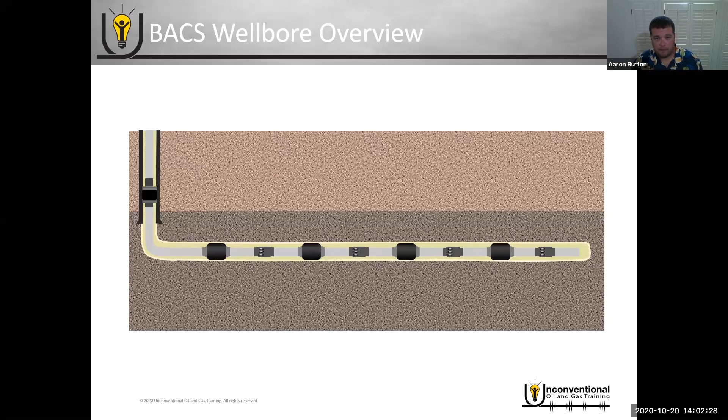The next system we'll talk about is the ball activated completion system. We'll start by looking at a well overview. We already have our horizontal well drilled in our target reservoir, with our intended completion run at depth. The key components are going to be open hole packers, which provide our annular isolation.

So at least initially, these were designed as open hole completion systems rather than cemented like we saw with plug and perf. The other key component is the ball activated frac sleeves.

Some of the other components, secondary components, are going to be the casing packer. I consider that a secondary component because as long as that packer can hold up to the weight of the completion below it, as well as the pressures and temperatures during the frac job, you can really run whatever packer you want there. You can run a liner hanger, a permanent packer, sand control packer, premium packers, or really whatever's cheapest and most readily available in your area.

Now, to give you some of the nomenclature here, this is toe-to-heel fracturing again. So the first stage in the system is stage 1, at the toe of the well, and then you work your way back up the wellbore.

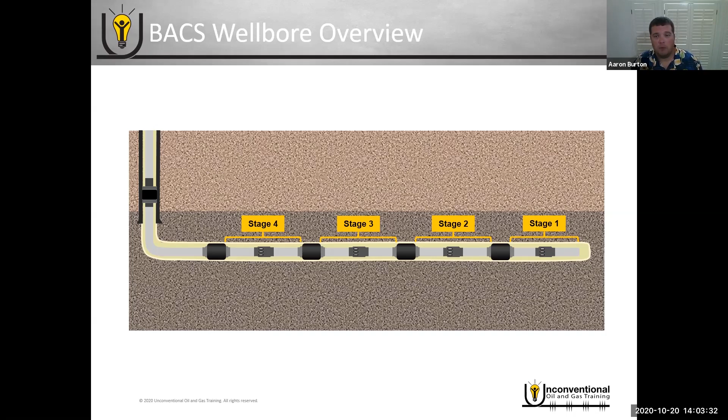Now just to give you a reference, these are installed with the drilling rig using your casing string. Each joint of casing is roughly 40 feet. So let's assume we want 80 feet of spacing between each of our tool components. We'd run 2 joints of casing, 80 feet, then make up this open hole packer to the casing. Then we'd run another 2 joints of casing directly to that packer, then our frac sleeve, another 2 joints of casing for 80 feet, and then another open hole packer. You would just repeat that process.

So you're actually going to run it with the drilling rig, spacing out in the well as you want to, as your frac design calls for. Then once you've installed the system, you can do all your setting that we'll go through right now, do your pressure testing, and then move your drilling rig off of location.

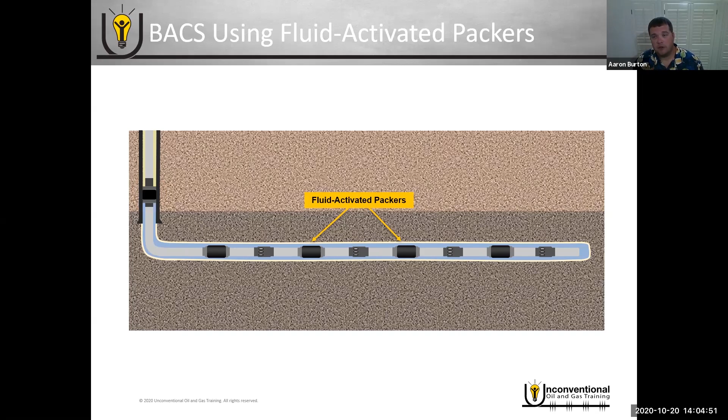The first setup we'll look at is the fluid activated packers. Once you've got your completion to the intended depth, you pump your activation fluid through your tubing, through your casing, into the annulus. Once you've spotted that fluid, you can set your casing packer. Once your casing packer has been set, you can pressure test, ensure everything is set, and move your drilling rig off of location.

Now over time, packers are going to react with that activation fluid. They're going to swell out and contact the target reservoir, and that's what provides your annular isolation between each sleeve.

Once you're ready to begin fracturing, you bring out your frac crew and drop the first ball in the system, pump it down hole to the first sleeve, and once it gets on seat, you apply pressure, shift that first sleeve open, and you can begin fracturing your first stage.

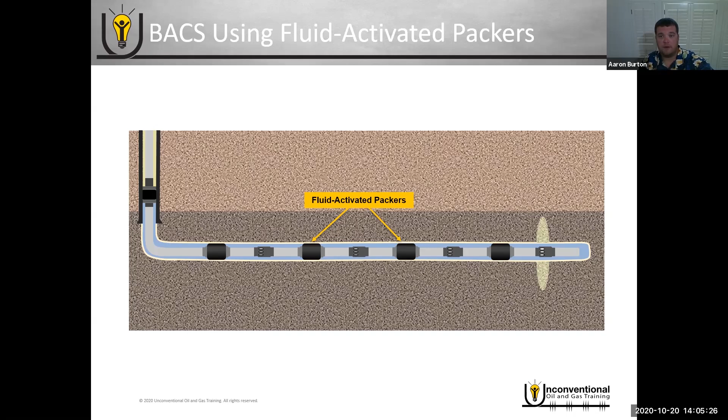The other type of setup for these ball activated completion systems is using hydraulic set packers. Once again, we already have our well drilled, we have our completion system in the wellbore, and we're using the casing to space out just like before, but now these are hydraulic set packers in this scenario.

So once you get to the intended depth, you're going to have one or two additional tools at the toe of the well. And the first one is going to be the isolation tool.

What that allows you to do is, when you're running the system in the wellbore, you can still circulate through your casing. But once you get to the intended depth, you drop the first ball in the system, pump it down hole, and once it lands on the isolation tool, you apply pressure, it shuts off, and now you have isolation through your tubing.

So once you've done that, that allows you to set all of your hydraulic equipment in the wellbore. So you'll continue raising your pressure, and these pressures are staggered.

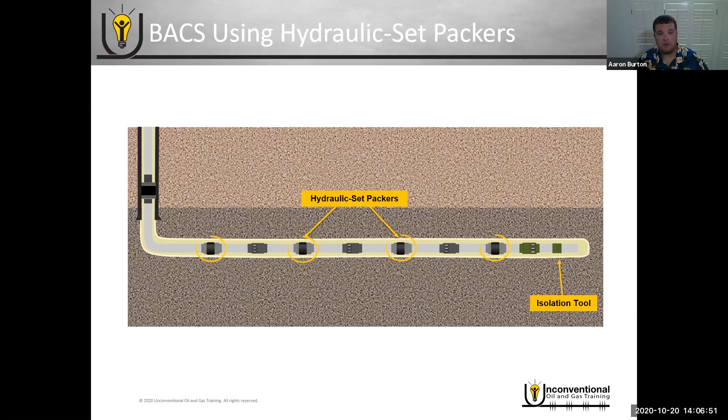Just to use some good, clean, round example numbers, maybe at 1500 PSI your casing packer will set. So you raise your pressure up to 1500 PSI, set your casing packer, and then maybe your open hole hydraulic set packer sets at 2500 PSI. So you continue raising your pressure to 2500 PSI and set your hydraulic set packers.

The second piece of equipment at the toe that's different is your pressure activated frac sleeve. Remember, as soon as you've set this isolation tool, you no longer have the ability to pump into your target reservoir, and above it these are the ball activated frac sleeves. So you're very limited as to what you can do through tubing - a tubing conveyed perforating run is not an option in most cases.

So this is a pressure activated frac sleeve that will open when you apply the right amount of pressure. If we set our casing packer at 1500 PSI and our open hole packers at 2500 PSI, then your pressure activated sleeve may be set at 5000 PSI.

That way you can set all of your hydraulic equipment, do all your pressure testing, and once you confirm that everything's holding, you can move your drilling rig off location, and the pressure activated frac sleeve remains in the closed position.

Once you're ready to begin fracturing, bring out your frac crew, you apply that 5000 PSI, the pressure activated sleeve shifts open, and then you can begin fracturing your first stage.

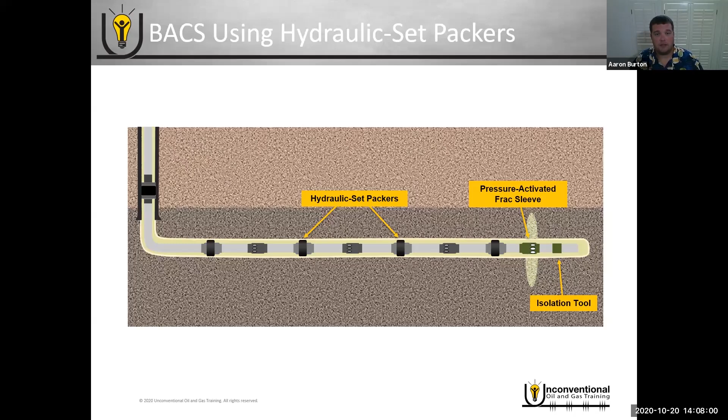Now, once you finish fracturing your first stage, it doesn't matter which setup you're using as far as the fluid activated packers versus the hydraulic set packers - the fracturing procedure is the same.

So we'll zoom in here to the second sleeve of the well. Overall, these are a very simple conceptual design. You've got a frac sleeve made up to your casing, and you have frac ports built into that sleeve.

If we look at a cutout view, behind that you're going to have an insert that's covering up the frac ports in the closed position, and it also has a ball seat profile in that insert.

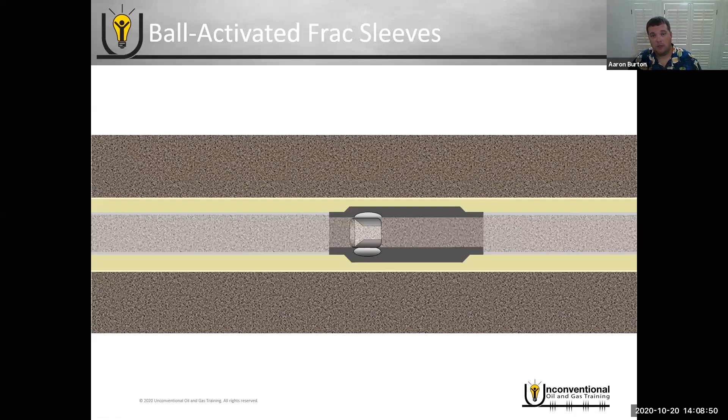So as we're fracturing stage one, we're pushing our fluid and proppant through all of the ball seats above it. Now, as we finish fracturing stage one, we drop the ball that corresponds to the second sleeve, pump it down hole. Once it lands on seat, we apply pressure, it shifts the sleeve open, and then you can begin fracturing your second stage. When the ball lands on seat, it provides through-tubing isolation from the previously fractured stage, and forces the fluid to divert out of the ports in this second sleeve.

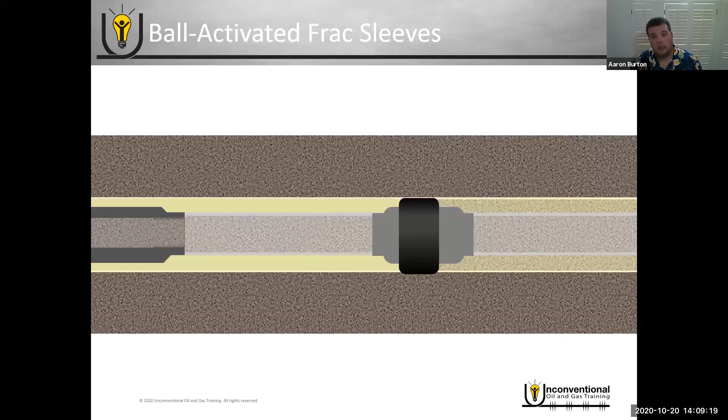So if we move up the wellbore to the third sleeve, as we're finishing fracturing our second stage, we drop the ball that corresponds to this third sleeve. We pump it down hole, it lands on seat, apply pressure, shift the sleeve open, and the fluid is diverted out of our third stage now.

So you don't actually ever have to shut down your frac job during the pumping process. You just have to drop the ball in and pump it down hole to the next seat.

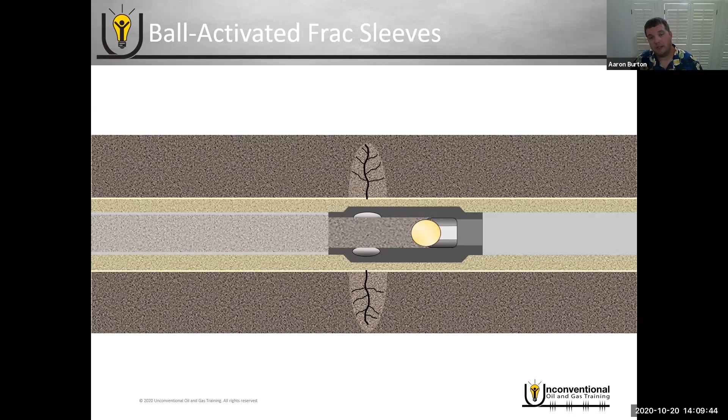It's a little difficult to see in this animation, but each of these balls gets larger as you go up the wellbore. So starting at the toe of the well, you have the smallest ball of the system, because that smallest ball has to get through all of the larger ball seats above it. They get incrementally larger as you go back towards the heel, so the smallest ball is at the first stage of the well, and the largest ball is at the heelmost, final stage.

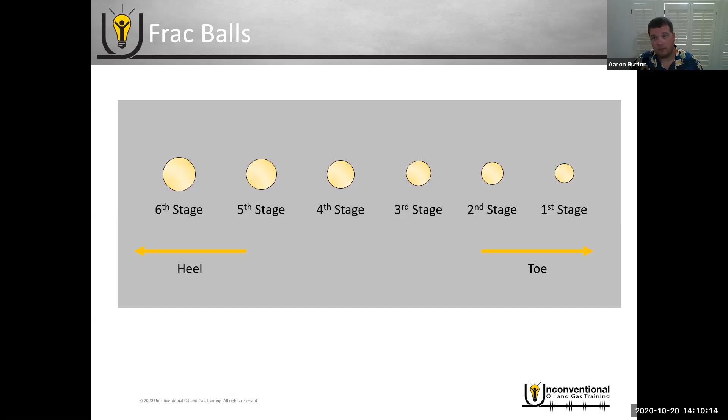To give you an idea of how many stages you can have with this type of system, a large majority of these systems are run in applications with 4.5-inch casing, mostly on the US side of the Bakken or Canadian plays. With 4.5-inch casing, if you need about 10,000 PSI, you're limited to about 40 stages with this system. But if you can go less than 10,000 PSI, or less than 5,000 PSI, you can get up to 60 or 65 stages, assuming you're using the openhole system we're discussing here. It's a little different in the cemented system we'll talk about in a minute.

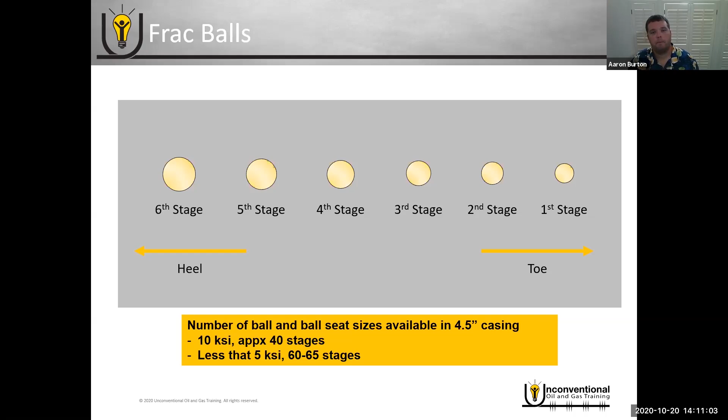After this, you just repeat the process of fracturing. As you're finishing your third stage, you drop the ball corresponding to the fourth sleeve, pump it downhole, and once it lands on seat, apply pressure, the sleeve shifts open, and you fracture the fourth stage. Then, without ever shutting down your pumping, you drop the ball for the fifth stage, pump it downhole, pressure up, open the fifth sleeve, and begin the fifth stage fracture. This is one of the highlights of this system—it's very efficient at surface because you don't have to shut down pumping between stages. If everything goes correctly, you get nonstop fracturing operations.

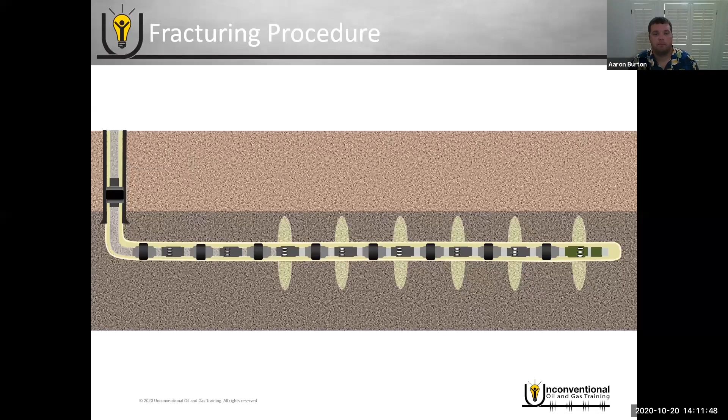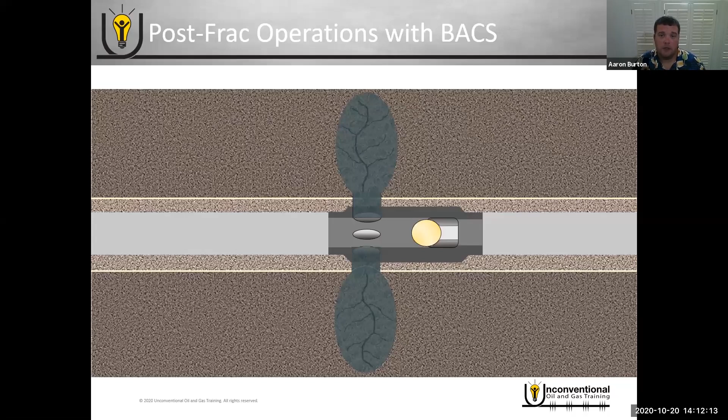We'll zoom back into an individual sleeve to talk about post-frac operations. We produce our hydrocarbons through the fractures we've created, and back through the ports in the sleeve where we fractured out of. So not only are the sleeves the conduit for the frac job, they're also the conduit for production as well. Production from below the sleeve will push that ball off seat and back towards surface.

In a lot of cases nowadays, those are also the dissolvable frac balls, very similar to the dissolvable frac plugs we saw yesterday. The frac balls are typically dissolvable alloys, and they'll disintegrate and remove themselves from the wellbore just in the fluids that are in the well. That way they don't stay in the wellbore or get caught up in it, and especially in oil plays where there's not enough velocity to bring those balls back to surface, that can be a good feature to have. The other thing about the dissolvable alloys is they actually add a lot of strength, so the 40 stage and 60 stage systems we were referencing were really unlocked because of these alloy balls having additional strength.

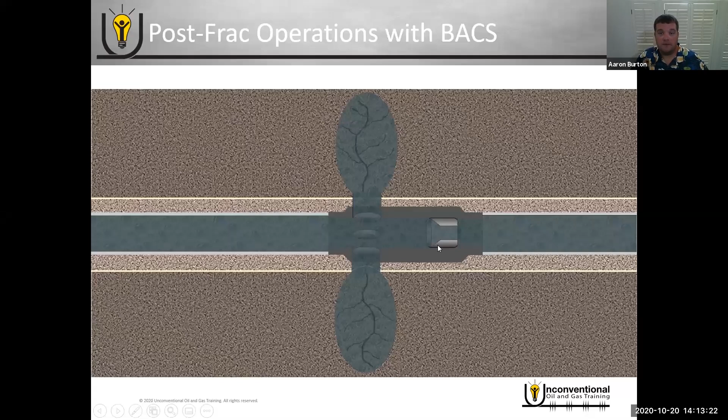Now, this is an interventionless system—you don't have to do anything after the frac job, you can just produce through it like we're showing here. But these ball seats have a diameter restriction, so if that's an issue, it is possible to go in and mill those ball seats out and get a near full wellbore diameter afterwards. The ball seats are designed, mostly of cast iron, to be as short and compact as possible and easy to mill out. So it can be an interventionless system with diameter restrictions, but you can go in and intervene afterwards and get your full diameter again.

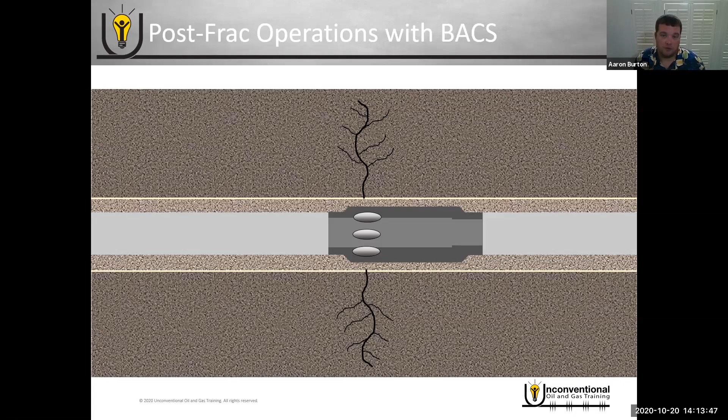This is a case history from the US side of the Bakken, from Nine Energy Services, and it really highlights the efficiencies with this type of system. If I recall correctly, this is a case history from 2013.

It's a 50-stage system with the 4.5-inch liners I was talking about, and you can see all the remaining frac job details there. By today's standards, this is a very small frac job, at least in the US, so keep that in mind as well. But to stimulate this 50-stage well, they had 51.2 hours total time.

So that's from opening the wellhead to begin fracturing to shutting it back in. The actual pumping time was 46.7 hours, so overall they were able to pump a 50-stage frac job in 46.7 hours. They also had non-productive time of 4.5 hours. I don't know for sure what it was, but if I had to guess, I'd say it was something like pump maintenance. Overall, this case history really shows how quick and efficient these systems can be at surface.

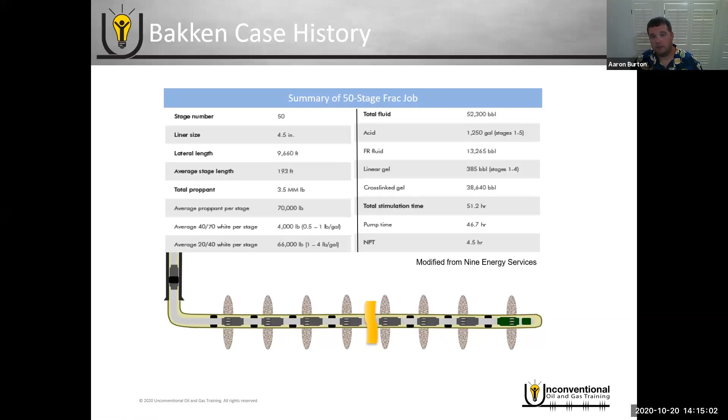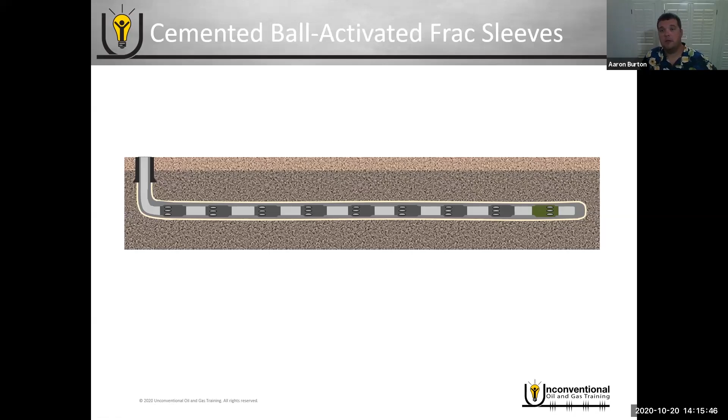Another alternate to the open hole system is the cemented ball activated frac sleeve system. Overall, the fracturing procedure is virtually the same, but your wellbore construction is different. Instead of having packers between the sleeves, you pump cement through the casing into the annulus, and that's what provides your annular isolation. At the toe, we have a cementable pressure activated frac sleeve. Once you've cemented it in place and done your pressure testing, you move your drilling rig off location, and once you're ready to begin fracturing, you rig up your frac crew, apply the right amount of pressure, the first stage sleeve opens, and then you drop the balls in the correct order, just like with the open hole systems.

It's important to consider that in the wellbore construction you have a couple of additional components. When cementing a well into place, you pump the cement through your casing, and you follow that with a cement wiper plug, which does exactly what it sounds like - it wipes the cement out of the casing so you don't leave any cement stringers behind, and it pushes the cement into the annulus.

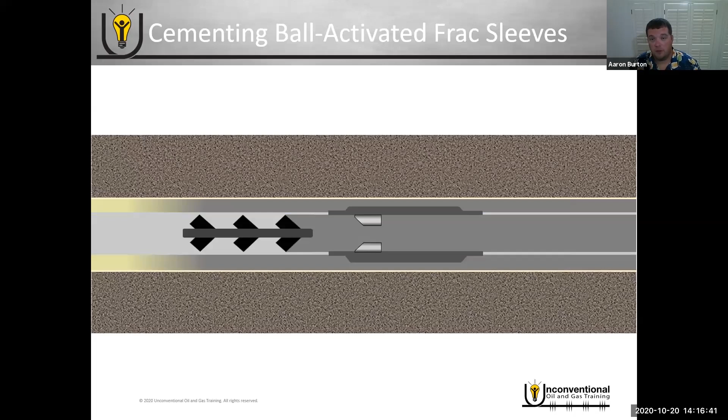It's no different when you have the frac sleeves, except now you're pumping through those reduced diameters in the ball seats. You still have to pump your cement through the casing, through all of the ball seats, and then follow it with the cement wiper plug so the cement isn't remaining in your casing and hindering your completion. It's important to consider this because the cement wiper plug can't get hung up in your ball seat and prematurely open the sleeve, otherwise you're going to open the sleeve and dump all your cement right back into your casing.

So there is a diameter restriction with the cemented frac sleeves. Generally speaking, it depends a bit on which service company you're using, but typically you're limited to a 2-inch diameter ball seat being the smallest one you can have in the system. What that translates into is typically 25, maybe 30 stages at max with these cemented sleeves.

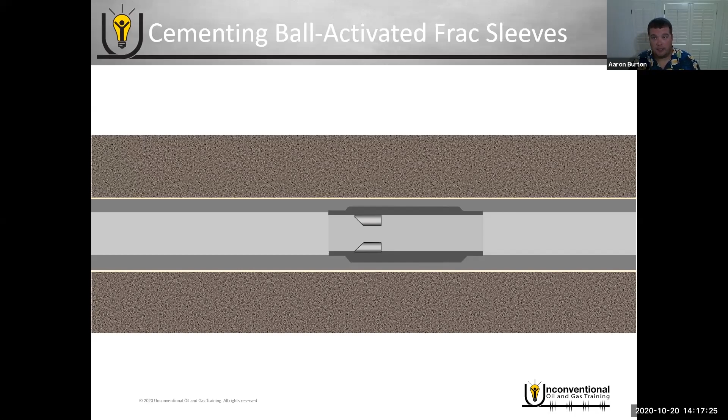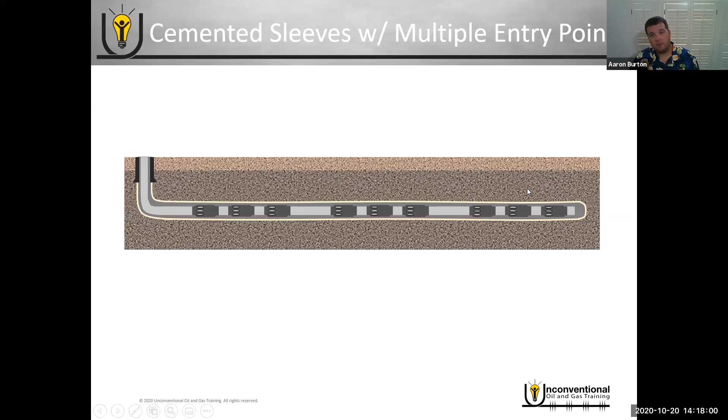But there is also another technology that allows the cemented sleeves to have multi-entry points. With these sleeves, the overall wellbore construction looks very similar to the regular cemented sleeves we were looking at, but now these are multi-entry sleeves. You're still going to drop balls in order, but the difference is each ball opens multiple sleeves - in this case, 3 sleeves per stage. So we drop our first frac ball, it opens this sleeve, passes through, opens this sleeve, passes through, and opens this sleeve, and it seats like a regular ball seat, opens this sleeve and isolates from below, and now you fracture out of each of these sleeves individually.

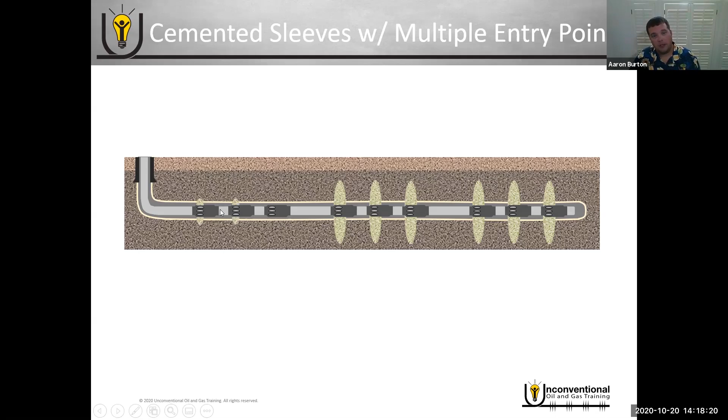You drop the next size ball and do the same thing for the next stage, and then you drop the next largest ball and do the same thing for the next 3 sleeves.

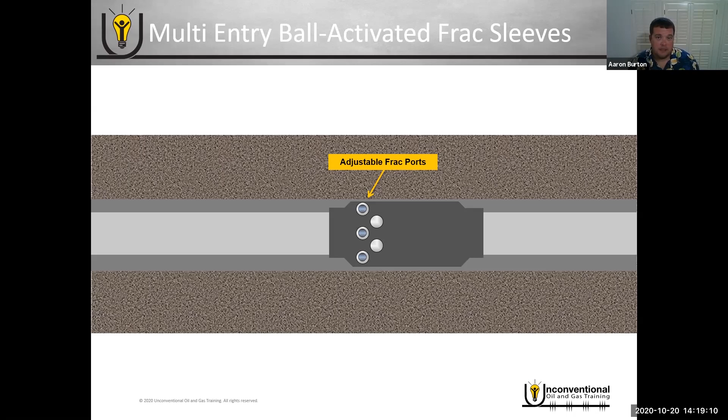Now, as we saw with the multi-entry ball frac sleeves, what that allows you to do is start mimicking plug and perf with multiple clusters. Because of this feature, in a lot of cases you'll see these multi-entry sleeves have adjustable frac ports. So instead of having fixed frac ports like we saw before, these are ports you can adjust - you can block some off if you want less flow area and you're trying to do a limited entry perforating strategy, or make some larger or smaller. So you have full capability to adjust and use these types of sleeves in a very similar fashion as clusters with plug and perf, and do any limited entry strategies you may have as well.

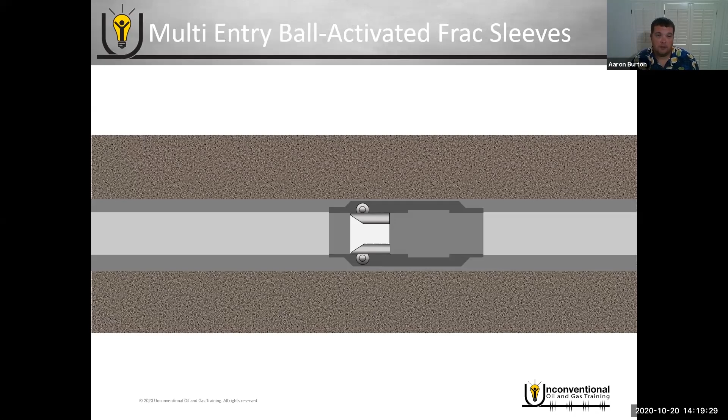If we look at the cutout view behind it, it's very similar to the traditional sleeves. You have an insert covering up those ports when it's in the closed position, and it has a ball seat profile in it. But with these sleeves, once the ball lands on seat, you apply pressure, shift it open, and now there's a slot in the back side of the sleeve that allows that ball seat to subside, and then the ball can keep moving down the wellbore and opening more sleeves. That's what gives it the ability to open multiple sleeves with one size ball.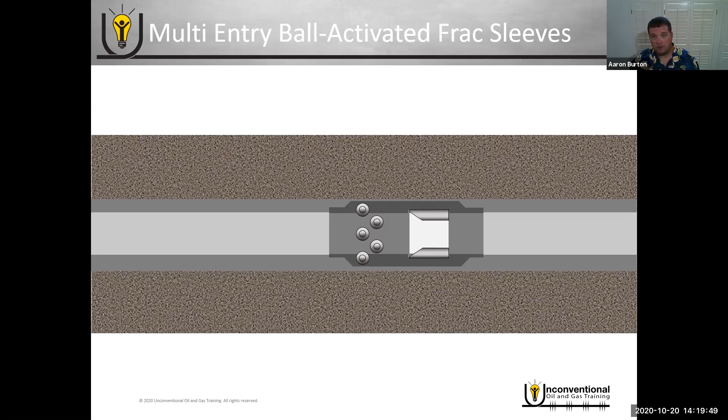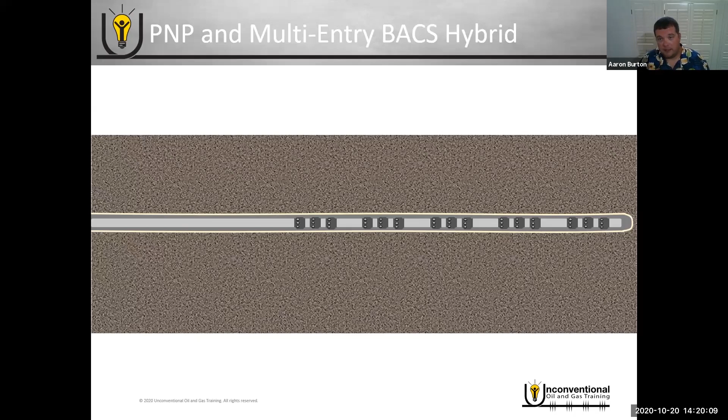A big part of the reason these are designed very similar to plug and perf is because that's where most of these types of sleeves are run right now, as a hybrid system with plug and perf. They'll run these multi-entry sleeves at the toe of the well, then drop balls in the correct order to open the sleeves, and once finished, switch back to traditional composite plug and perf perforation or fracturing operations.

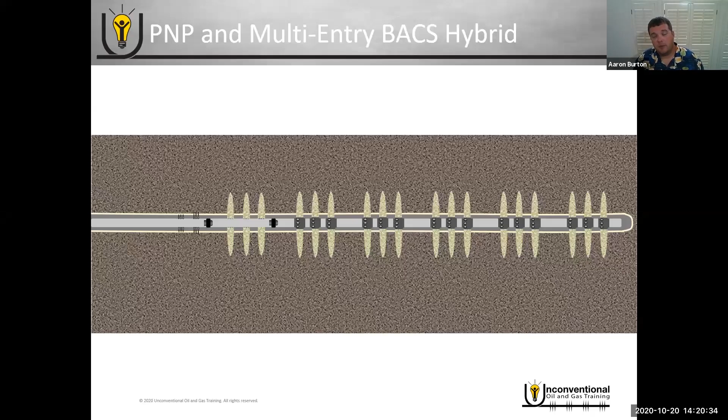Once they finish those, they go back to their plug and perf assembly to finish up the well. The reason they do this is because typically in longer laterals, they're trying to do plug and perf within their safe operating range of coiled tubing, but want an interventionless system outside of their coiled tubing range. This allows you to use plug and perf in longer laterals, just like we saw with the dissolvable plugs. You run those at the toe because it's interventionless, and you don't have to risk mill-out operations in those longer laterals.

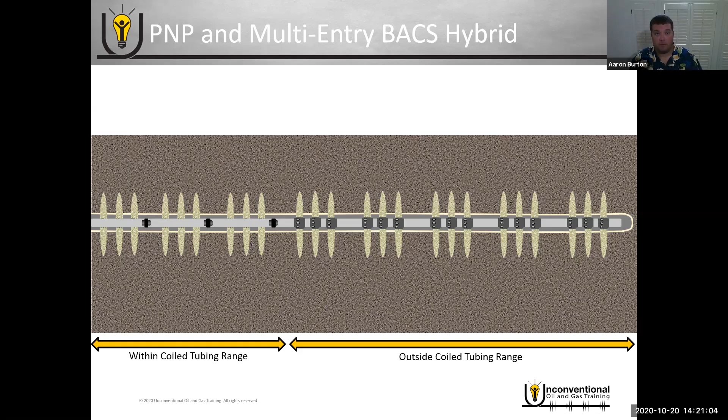One of the newer technologies with these types of sleeves are frac sleeves with counter mechanisms. There's a lot of different ways to do this, and several service companies do have some of these sleeves available now. The version we're going to look at here is based purely on mechanical motion.

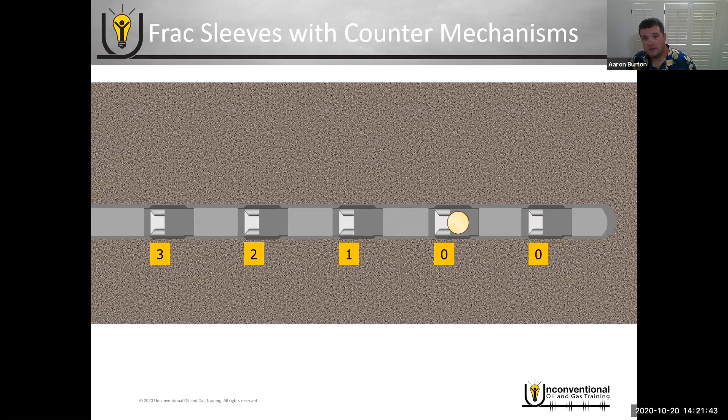So we have 5 sleeves here. The yellow number tag is the counter on the sleeve. We drop a ball, and each time the ball passes through a sleeve, the counter counts down 1. So when the ball gets to sleeve 0, it's in the set position. You can apply pressure, shift that sleeve open, and then begin fracturing in the first stage.

Now you're going to drop the exact same size ball again, and it's going to count down, but now the second sleeve in the system is on the 0 counter and in the set position. Once the ball gets there, it catches, you apply pressure, shift the sleeve open, and begin your second stage fracture. Then you drop the exact same size ball again, and it counts down, but now the third sleeve is at the 0 count and in the set position, so it catches, you shift the sleeve open, and begin fracturing your third stage.

Like I said, there's a handful of service companies - I think my last count was maybe 8 at this point - that offer a version of this type of sleeve. It can be purely mechanical motion that counts, it can also be electronics in the sleeve that count, and there are some versions that use both mechanical and electrical components to count the frac balls as they pass.

So the benefit of these types of sleeves is you get a virtually unlimited number of stages with a minimal diameter restriction, or in some cases with the electronic sleeves, you might not even have a diameter restriction because you're not relying on a ball seat diameter. That's the whole point of these sleeves - that's the innovation - trying to get that virtually unlimited number of stages with minimal or no diameter restriction.

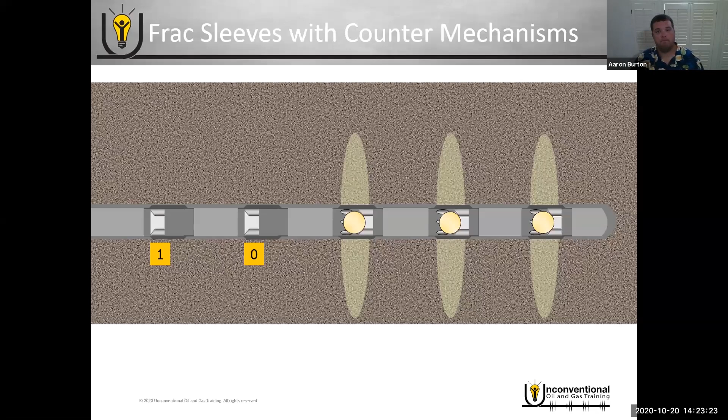What this system allows us to do is actually pump the ball seat into the well and into the insert. So on the insert, instead of having a ball seat, we have a collet profile, and the ball seat itself that we're pumping down hole has a collet on it. Just to clarify, this is not with wireline - this is pumped down, just the ball seat itself. The way you're able to do that is you already have the ball on seat as well, which gives you enough surface area to pump that assembly down hole without it having to be on wireline.

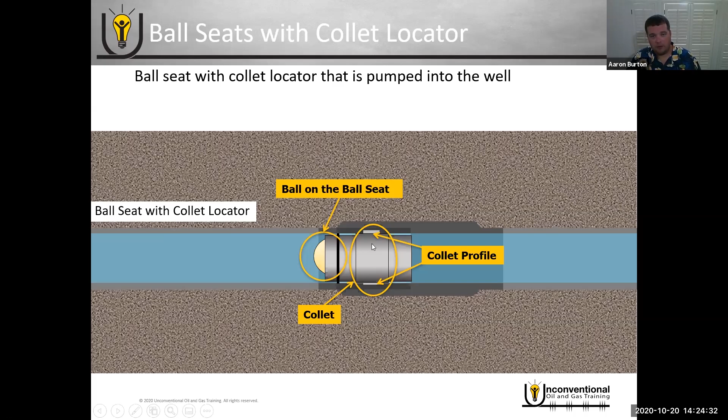Now, as you can see here, the collet and the collet profile do not match up - the collet's too big for this collet profile, so it continues pumping down the wellbore. As it continues moving down the wellbore and comes to the seat that it correlates with, that collet will snap into the profile, and then the ball seat is placed in the frac sleeve.

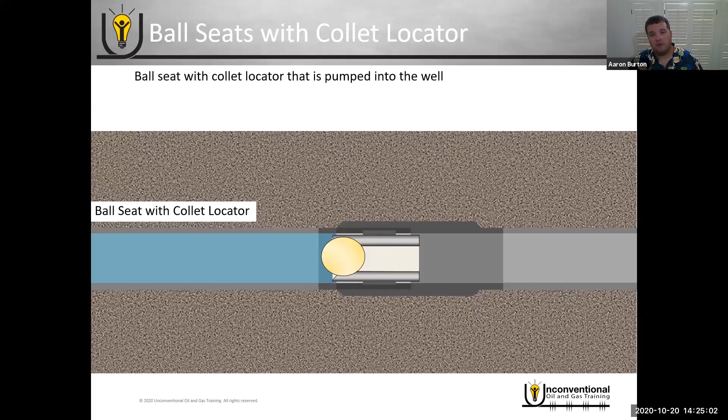Now if we look at the cutout, this is just the ball seat itself, but the ball is already on seat. So once we latch in the sleeve, we're going to apply pressure, shift the sleeve open, and we expose the frac ports, and it looks just like you would with a traditional sleeve now.

Once you're finished fracturing, the ball will dissolve, remove itself from the seat, and because you're actually placing the ball seats in the wellbore, you can use the same size ball seat over and over again. So you're going to choose the largest size ball seat, and you can do one of two things.

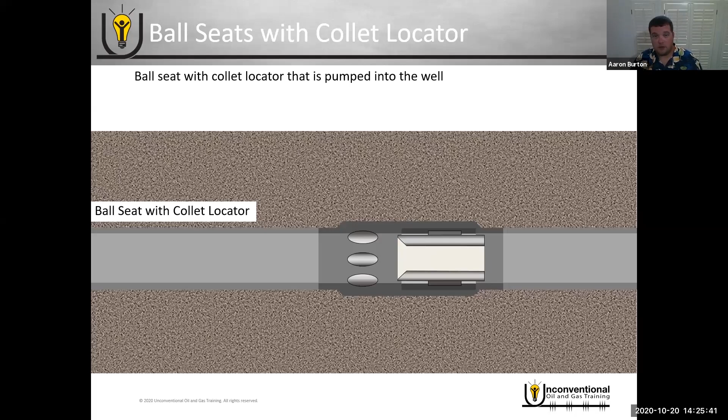You can either consider it an interventionless system and produce through that large profile, or if you think that's going to be a problem, then you can go in and remove these ball seats with the collets with through tubing intervention. So you run in your through tubing tool, you expand it out once you get past the seat, and then you can pull up the wellbore and drag the ball seats back out of the well.

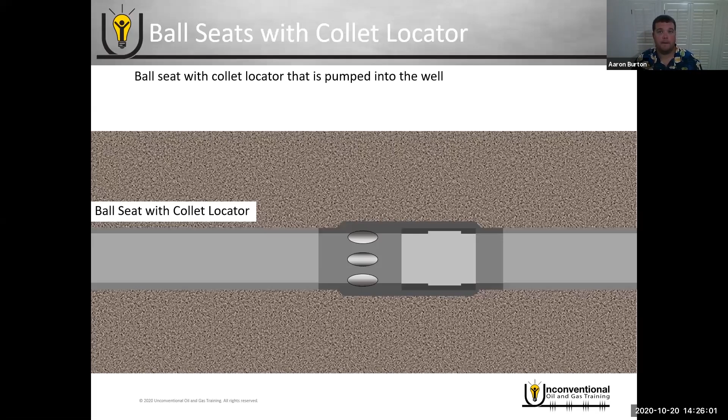So that's the ball activated completion system. The next system that we're going to discuss is going to be the coiled tubing activated system.

And we're going to start with the setup that's not really commonly used now. A couple of Canadian operators still use this setup, but for the most part, these systems are set up with sleeves. But you'll see here in a minute why it's important to understand using it with the Sand Jet Perforator.

So we already have our horizontal well drilled. We're going to run our casing in with our drilling rig. Once we get to the intended depth, we pump cement to provide annular isolation. So overall, the wellbore construction looks identical to plug and perf. It's just a cemented casing string in the wellbore. Once you've pumped your cement and done your pressure testing, you can move your drilling rig off location.

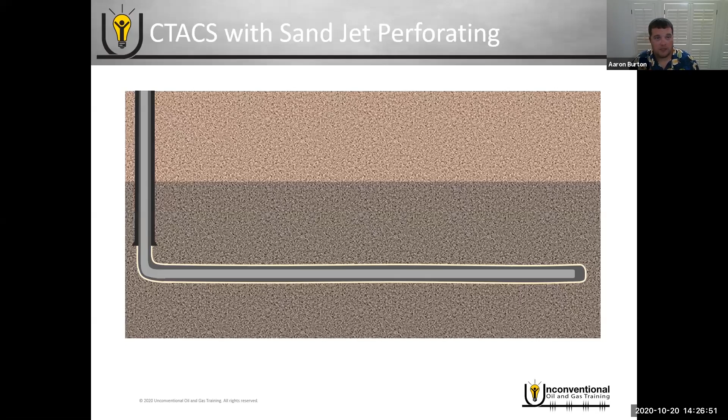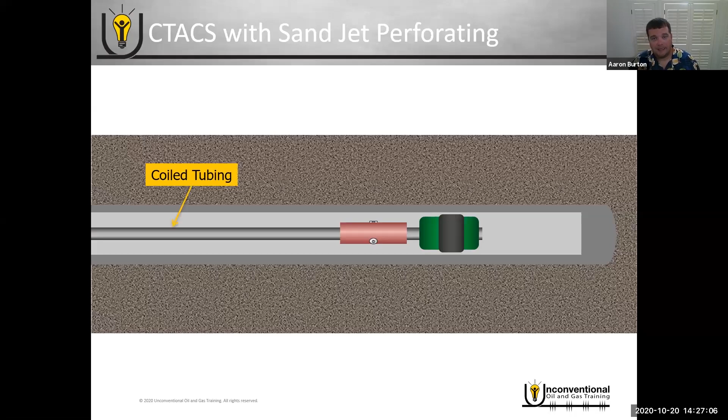So if we zoom into the toe, once we're ready to begin fracturing, we bring out our pressure pumping and our coiled tubing unit. And our coiled tubing assembly will consist, of course, of coiled tubing. And then there's going to be several other components, but the two primary components are going to be a coiled tubing packer and a Sand Jet Perforator.

So once we get to the intended depth, we're going to set our coiled tubing packer, and then we're going to pump an abrasive slurry through the coiled tubing and out of the Sand Jet Perforator. So this is going to create an abrasive perforation. It's going to cut through the casing, through the cement, and into the target reservoir.

And once you're finished Sand Jet perforating, you shut down your flow through the coiled tubing, and then you're going to pump your frac job down the annulus and out of the perforations that you've created. Once you're finished, you unset the packer, and then you can move up the wellbore to the depth of your second stage.

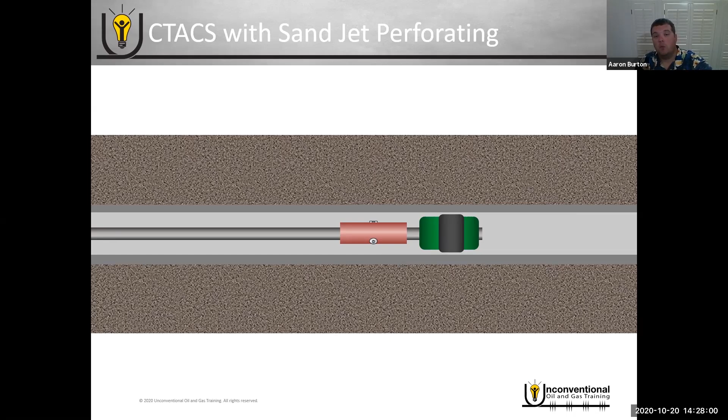So once you've located the depth of your second stage, you reset your coiled tubing packer to isolate from below, and then you're going to pump the fluid and proppant, fluid and sand through your coiled tubing out of the Sand Jet Perforator and Sand Jet perforate your second stage.

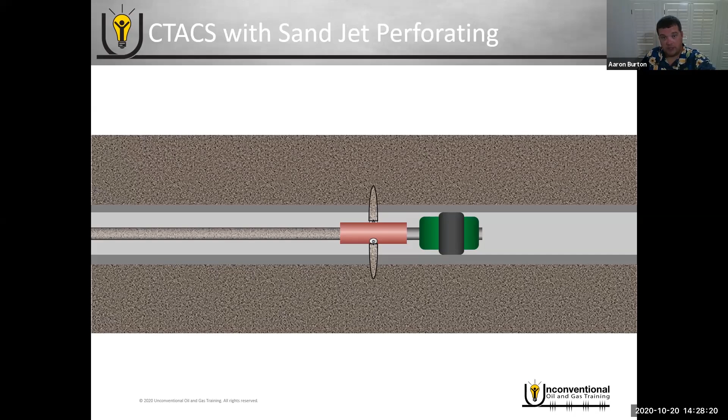Once you're finished, shut down your flow through your coiled tubing again, pump down the annulus to fracture your second stage, and then you're just going to repeat that process.

Now, a lot of times you're going to hear the coiled tubing activated completion systems called annular fracturing. And the reason being is because you're pumping the frac job through the annulus between the coiled tubing and the casing. So if you ever hear someone refer to annular fracturing, that's what they're referring to, the coiled tubing activated systems.

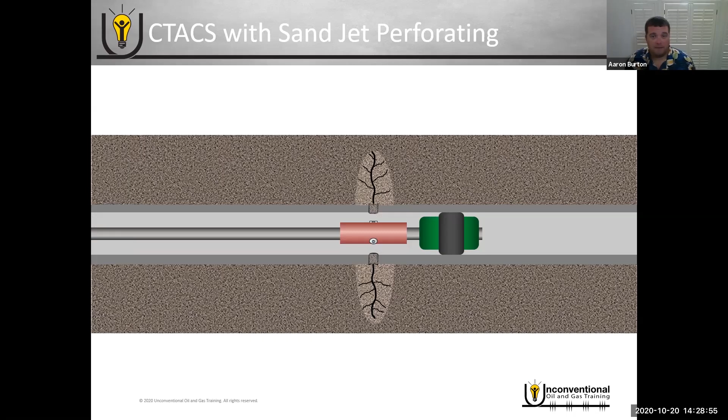So you shut down your frac job after you finish fracturing your second stage, pull to release your packer, and then you can move up the wellbore and just repeat that process until all the stages in the wellbore are finished. You just locate the depth of your next stage, Sand Jet perforate, fracture down the annulus, and then just do that until all stages are fractured.

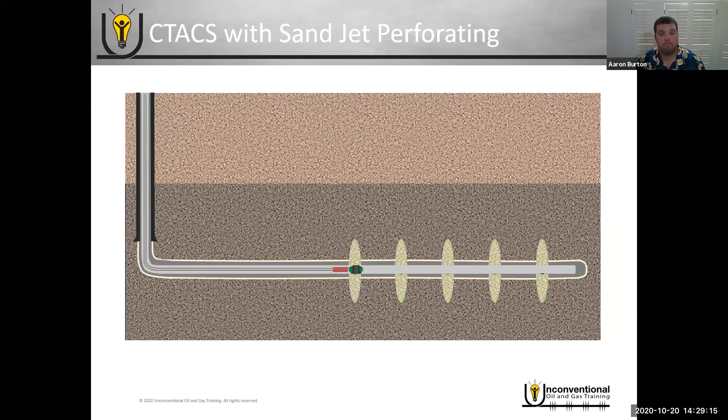Now, the most common way to set up the coiled tubing activated system is the frac sleeves. So we've got our frac sleeves already in the wellbore, made up to the casing string, just like we saw with the ball activated system. Just to recap, each casing joint is 40 feet. So if you wanted 80 feet between each stage, you would run a sleeve, 2 joints of casing, and a sleeve, 2 joints of casing, and a sleeve. That's how you space that out with your casing string.

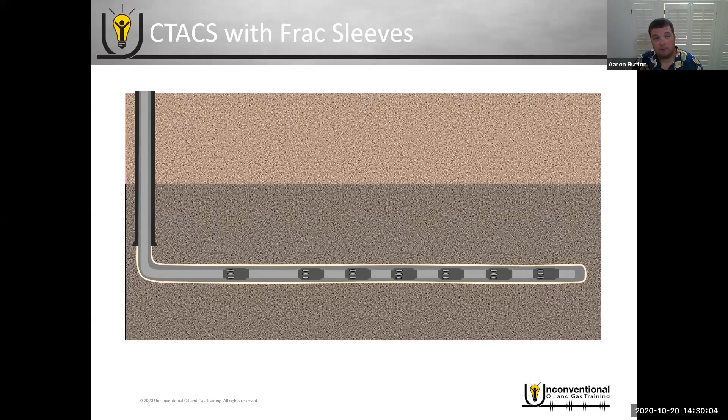Once you get to the intended depth, pump cement to provide isolation to the annulus. Once you're finished pumping cement, you do your pressure testing, and you can move your drilling rig off location. Once you're ready to begin fracturing, bring out pressure pumping and coiled tubing, and run your coiled tubing assembly into the wellbore.

Overall, the assembly looks very similar to the Sand Jet Perforator that we saw before, even though the Sand Jet Perforator is not the primary means of diversion in this setup. We'll look at some of the benefits with having this setup.

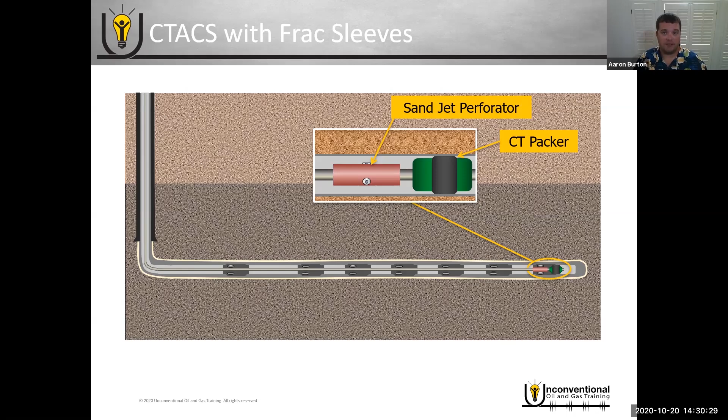So we locate our first sleeve, we open it, and we begin fracturing down the annulus. Pull to release the packer, locate the second sleeve, open that sleeve, and fracture down the annulus. Then pull to release the packer, locate the third sleeve, fracture, and repeat that process until you finish fracturing all the stages.

One of the immediate benefits of the Sand Jet Perforator is it gives you some flexibility during the frac job to adjust stages on the fly. If you decide that you need to add an additional stage between this sleeve and this sleeve, it's possible to do so with the Sand Jet Perforator. You pull to release the packer, locate the depth of the stage you want to add, pump down the coiled tubing through the Sand Jet Perforator, create the abrasive perforation, and then you can add that stage into the system.

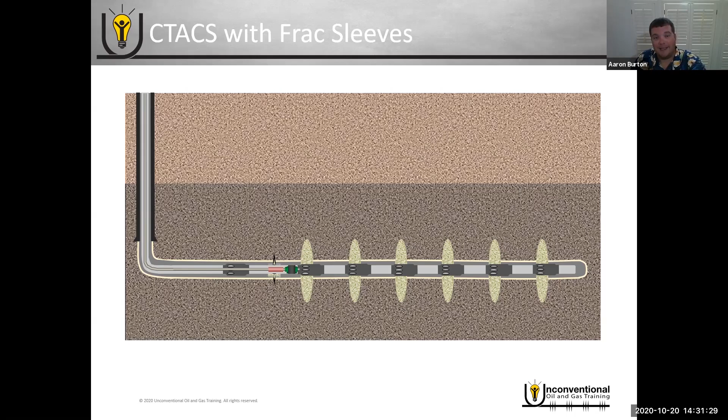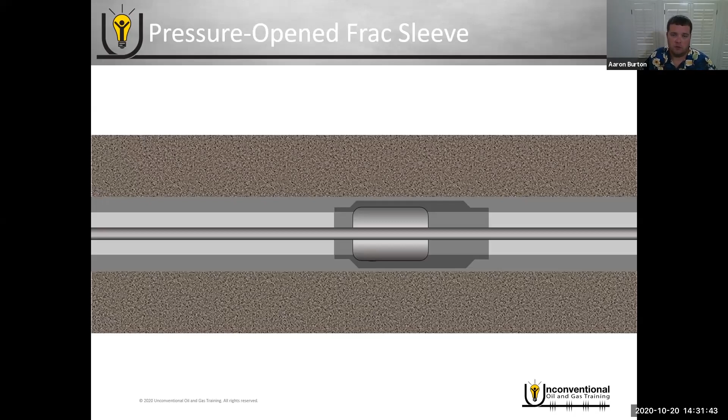There's a couple of different options with these frac sleeves. The first and most common is the pressure open frac sleeve. We've zoomed in on one of the stages, with a cutout view of the sleeve, and you can see there's an insert in the frac sleeve. So we pull up with our coiled tubing, locate that insert, and set our coiled tubing packer into that insert, so the slips on the packer grip in there. That allows you to translate pressure into force against that insert. Because that packer is isolating, the pressure turns into force, and it shifts that insert open and exposes the frac ports so you can fracture out of those ports. The coiled tubing packer will isolate through tubing between the previously fractured stage.

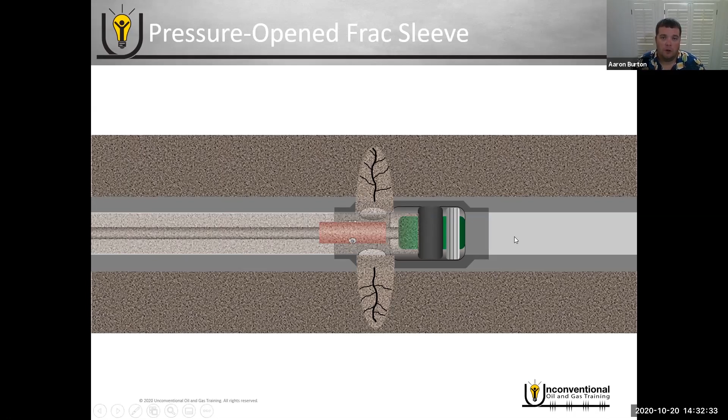The other option of frac sleeve is the pressure balanced frac sleeve. With these sleeves, you have a couple of ports. You go in, locate the sleeve, set your coiled tubing packer in between the ports on the sleeve, and then apply pressure. With this setup, you have an upper port and a lower port. Now the coiled tubing packer has isolated, and the pressure is only seen by the upper port, whereas the pressure is not seen on the lower port. That creates a pressure imbalance and allows that sleeve to shift open.

Let's assume we're applying 5,000 psi from surface, and we don't really have any pressure below us. That 5,000 psi pressure imbalance allows that insert to shift open down hole, and the coiled tubing packer isolates from the previously fractured stage as well. Now, all the other sleeves in the wellbore do not have that coiled tubing packer isolating, so the upper and lower ports on those sleeves both see 5,000 psi, so they remain in a pressure balance position and in the closed position.

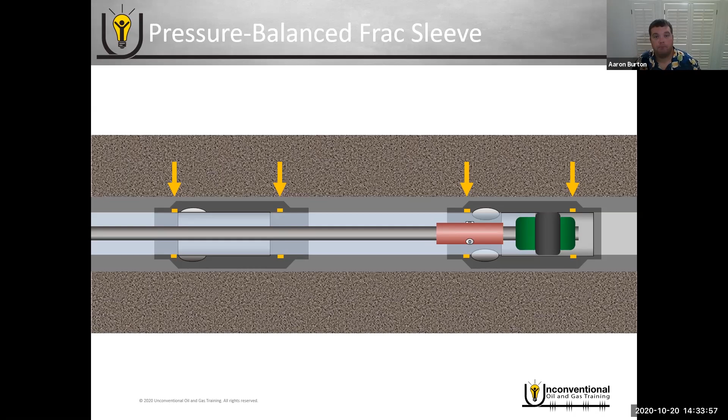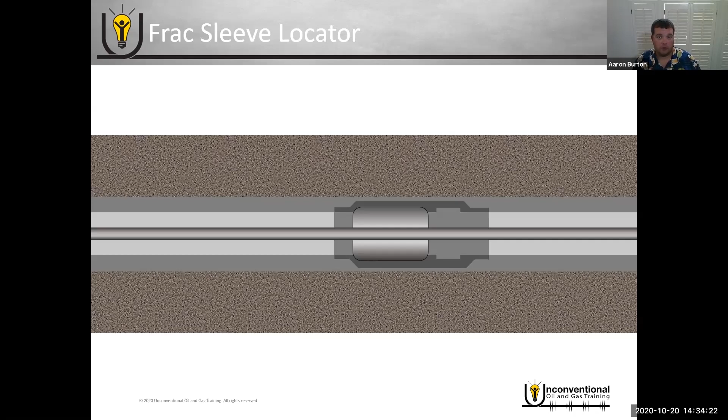Most of the sleeves used nowadays have switched to a frac sleeve locator because it's a lot easier and a lot more accurate to locate the frac sleeves. As you saw on both designs of the frac sleeve, whether you're setting your packer in the insert and applying pressure, or setting your packer between the ports and applying pressure, it's very critical that you know exactly where your assembly is with these sleeves.

That's where the frac sleeve locator comes into place, because you'll have a profile built into your frac sleeve, and the coiled tubing assembly will have a locator on it that snaps into place or locates that sleeve. That way, you space out your coiled tubing assembly so you know your packer is in the right place in that sleeve to either grab the insert or isolate between the two pressure ports.

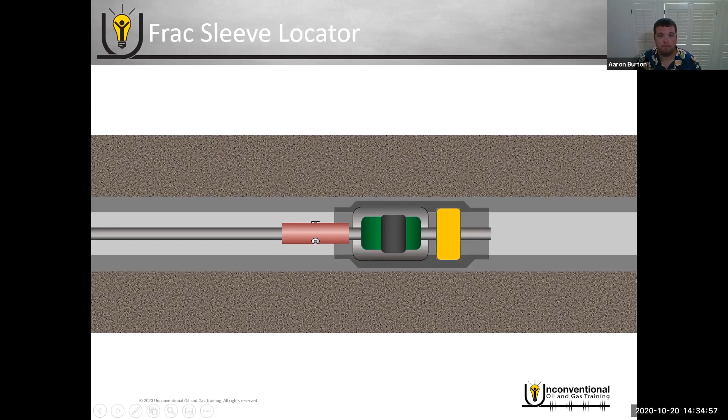So if we zoom back in and look at fracturing operations, it is once again annular fracturing, fracturing down the annulus between the coil tubing and the casing and out of the ports we've opened, with your coil tubing providing the through tubing isolation from the previously fractured stage.

Now, when we're doing that, we're applying a collapsing force on our coil tubing. So in fracturing operations, in most cases, we're actually going to pump a little bit down the coil tubing as well. It's going to be a very low rate, and depending on how you set it up, in most cases it's not going to actually be contributing to the frac. But one of the primary things it does is put a pushback force against that collapsing force and helps protect your coil tubing from collapsing.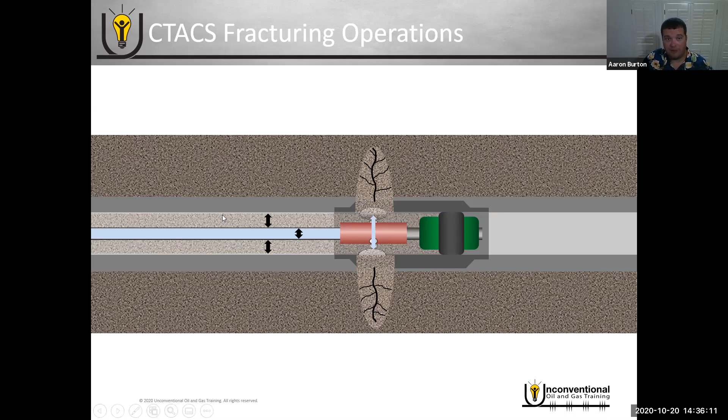So that can be very handy in preventing screen outs. As we talked about on our first day, a screen out can be very detrimental in these operations because it can cause you to shut down since you can no longer pump into your wellbore. So when you have live pressure monitoring through that dead leg pressure reading, once you see those pressure spikes or the pressure rising, you can adjust your frac job accordingly and try to avoid the screen out in the first place.

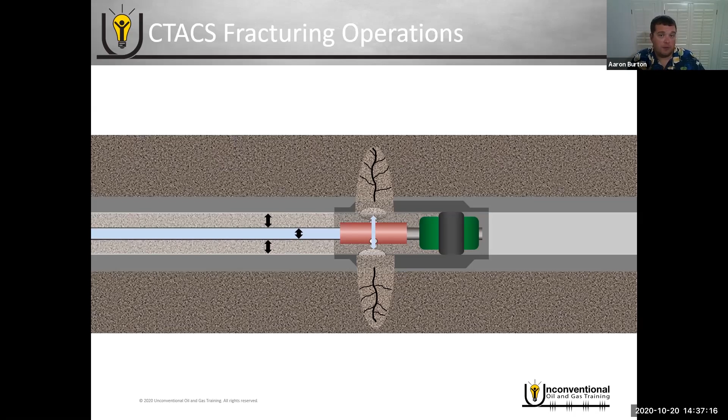But if you are in a situation where you do screen out, maybe you just didn't catch it in time or it popped up on you all of a sudden, and you can no longer pump into the wellbore through the annulus because your proppant's backed up in your casing, there's an automatic contingency option built in because of that Sand Jet Perforator. In some cases, you might even have the option of opening a circulation sub.

So what you can do in this situation is pull to release the packer if you possibly can, and that'll allow you to move your coil tubing down the wellbore. You can shift it up and down, and you have the ability to circulate fluid through your coil tubing out into the annulus, clean out that excess proppant from your casing, and then move on to the next stage.

So if a screen out does occur with this system, it is hands down the best contingency option, because you already have coil tubing in the well at the depth of the problem, with the ability to circulate through coil tubing and back to surface.

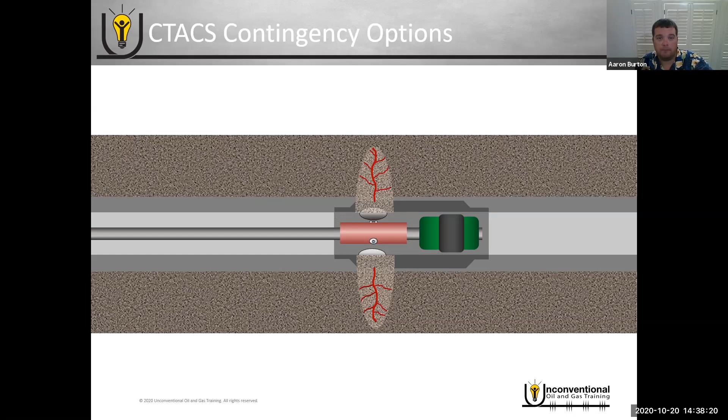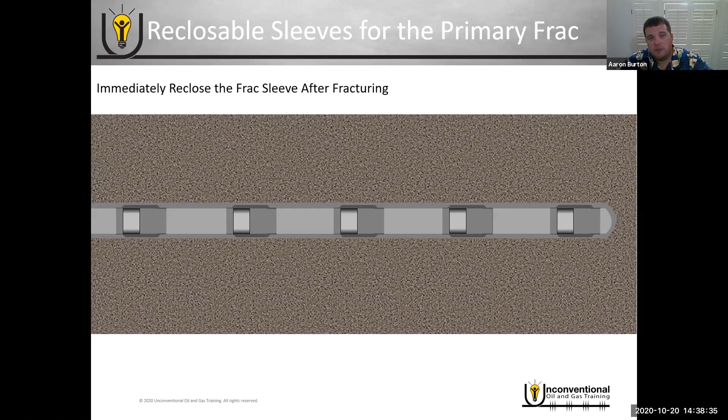So one of the newer technologies for this type of system is reclosable sleeves, and there are a lot of different potential applications for these. One of the first is to use them in the primary frac. What you can do with these sleeves is go in, open them just like you typically would, shift the sleeve open, and fracture that stage. But right after you finish fracturing, you shut down your frac job, and you can reclose the sleeve immediately.

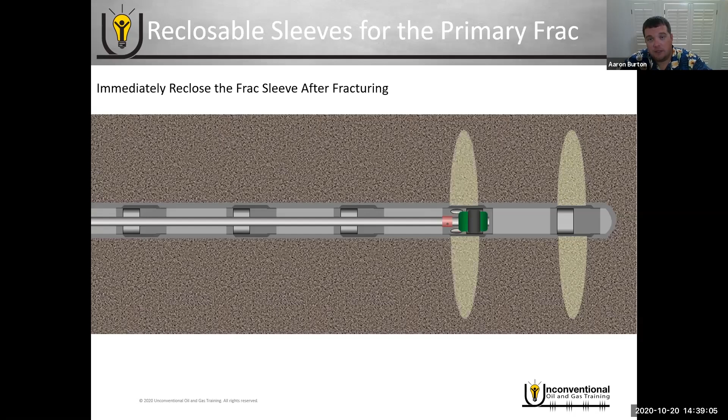You go up hole, locate the second sleeve, and do the same thing: open that sleeve, fracture your second stage, and once you're finished fracturing, you reclose that sleeve. You just do that for every sleeve in the well. After you're finished fracturing, you go in, reopen all the sleeves, and put the well on production.

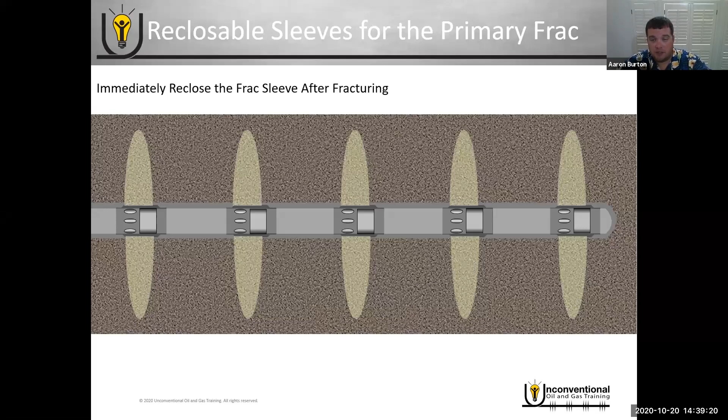Now this particular application is going to be very formation dependent. So what you might see those sleeves used for is an application where your formation takes a few hours or maybe even a few days to close back on the fracture you've created. Because until that force from the formation tries to close in on your proppant and hold it in place, the proppant is more or less free floating, if you will.

So what can happen there is once you bleed off the pressure after you're done fracturing and move off to your next stage, that proppant near the wellbore could flow back into the well, and that could hinder your production because you've lost your near wellbore conductivity at that stage. So this allows you to help the formation, give it time to close on the proppant and hold it into place, and get overall better near wellbore conductivity. It really just depends on your formation, how quickly it's going to close.

I've talked to a Canadian operator that had a lot of success with this sleeve in one of their plays. To give you some reference, they used to use non-closing sleeves, then do a clean out trip afterwards and remove a lot of excess sand because the sand was just falling back in. If I recall correctly, they estimated it took maybe 10 hours for their formation to close and hold the proppant into place. So they tried these types of systems, and once they went back in and reopened the sleeves, they had virtually no proppant fall back into the wellbore. They considered it a very good success.

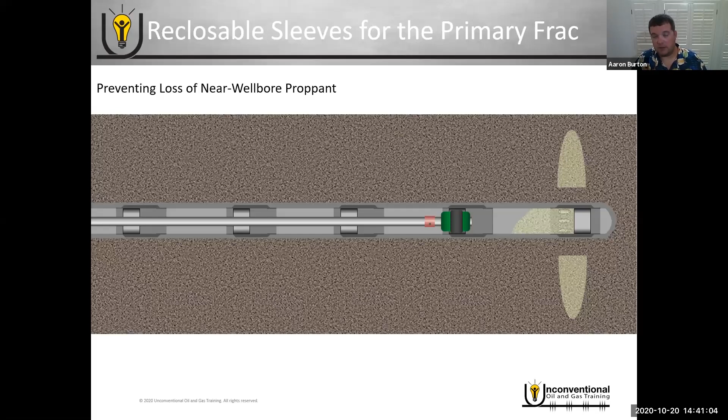Now, the other unique thing about these sleeves is when you reclose them, you re-isolate your wellbore. Every system we've looked at so far is limited to toe to heel fracturing, because if you're doing plug and perf, you can't perforate at the heel and then go below it since you don't have a means to isolate it. With either of the frac sleeves, you can't open the sleeve at the heel of the well first and then go below it because you have that open exit point.

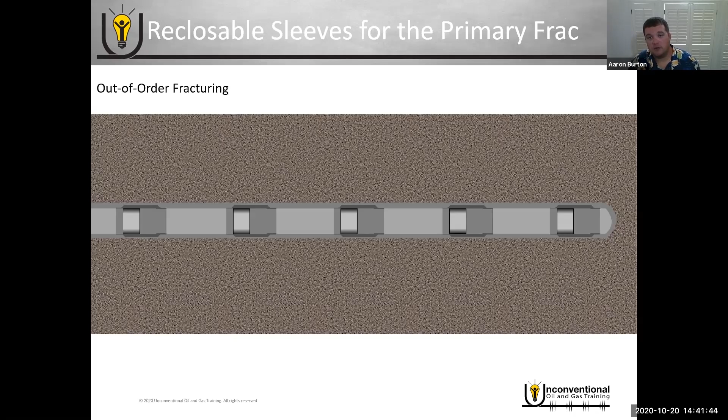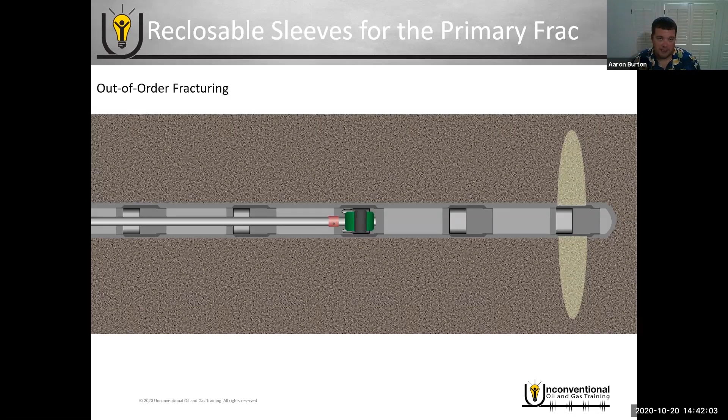So you're limited to toe to heel fracturing, but these reclosable sleeves give an interesting option to do out of order fracturing. You can go in, start at the first sleeve, open it, fracture, then reclose it. For our second stage, we go to our third sleeve in the system, open it, pump down the annulus to perform the frac job, and once finished, reclose the sleeve. Now, because that sleeve is reclosed and re-isolated, we can move back down the wellbore, still have that annular isolation, and use our second sleeve in the well as our third stage in the overall frac. So we open it and fracture between those stages.

The theory behind why you might want to do out of order fracturing is really kind of playing on stress shadowing effects. So you're fracturing your first stage, then your second stage at the third sleeve, and then coming back and placing the frac in between those. At least in theory, if it works as the theory says, with stress shadowing and things like that, you get a more complex fracture network and therefore better production. I know a few operators are experimenting with out of order fracturing, so it'll be very interesting to see what kind of results we get.

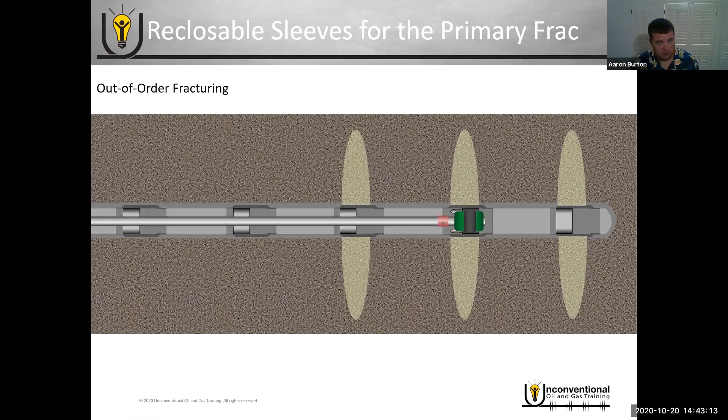So once you're finished fracturing, you go back in and open all the sleeves up for production. Then once the sleeves are open, you can produce back through those ports that you fractured out of as well.

As you've seen here, these types of systems were really initially designed for cemented applications, so the sleeves could be cemented into place without any issue. But they can also be used in open hole applications as well, so really the only thing that's different is the wellbore construction. Instead of running your sleeves and cementing in the annulus, you're going to run your sleeves and place your open hole packers between the sleeves to achieve the annular isolation. So open hole isolation is definitely an option.

When these systems came out in 2010, 11, 12, somewhere in there, there were a handful of operators that preferred the open hole sleeves, but to my knowledge, all of these systems are run with cemented isolation now. But you never know when you might come into a scenario where open hole isolation is the preferred isolation method.

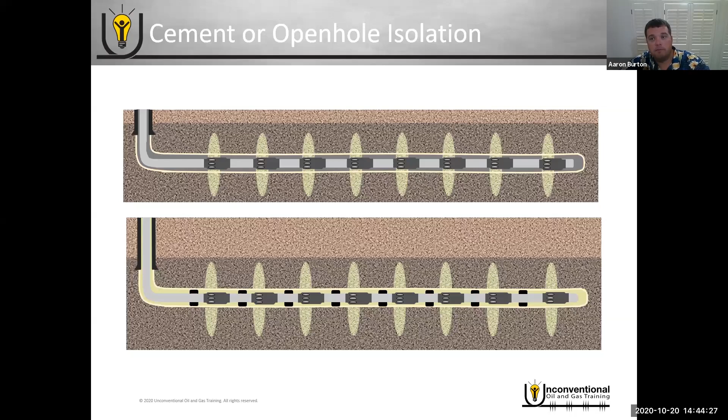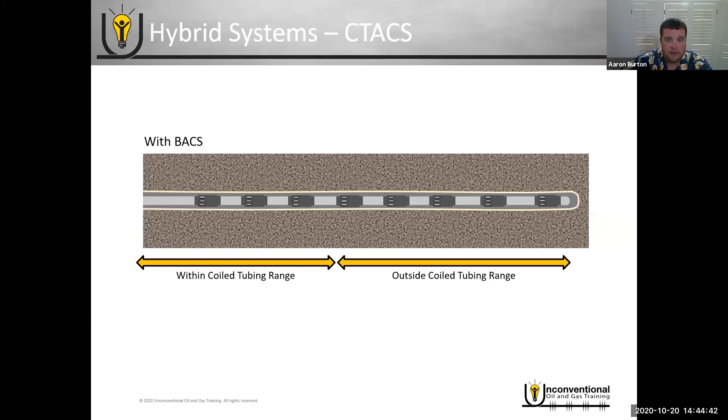You can also combine these two systems for a hybrid type system. You can run the ball activated sleeves at the toe of the well, outside the range of coiled tubing, like we saw before. That allows you to drop the balls at the toe of the well and fracture it. Then once you get within the safe operating range of coiled tubing, you switch to the coiled tubing activated sleeves and fracture as you typically would. This gives you an interventionless system at the toe and allows you to extend this type of completion into longer laterals.

For example, if you look at operator investor reports for the U.S. Bakken around 2013, there was a lot of experimentation with coiled tubing activated sleeves. Some of their 105 stage systems actually had about 10 stages of ball activated sleeves at the toe of the well, so those were actually hybrid completions.

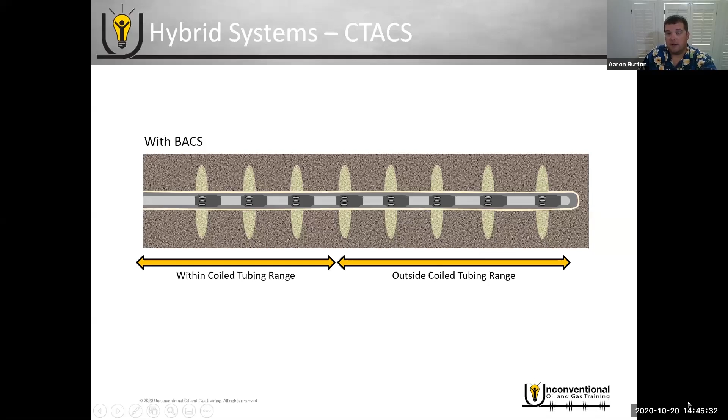So that's it for today. That covers the other two types of completion systems that complement plug and perf. At this point, we'll open it up for questions and answers.

Thank you, Aaron, this was a very informative session. We didn't receive any questions because you explained everything so clearly. Well, I guess that's either a really good thing or a really bad thing, right? Everybody's either really confused or it was explained so well there was no need for questions. So yeah, you explained very well. Thank you so much. Well, let's give it a few minutes for any questions that might come in. Okay, let's do this.